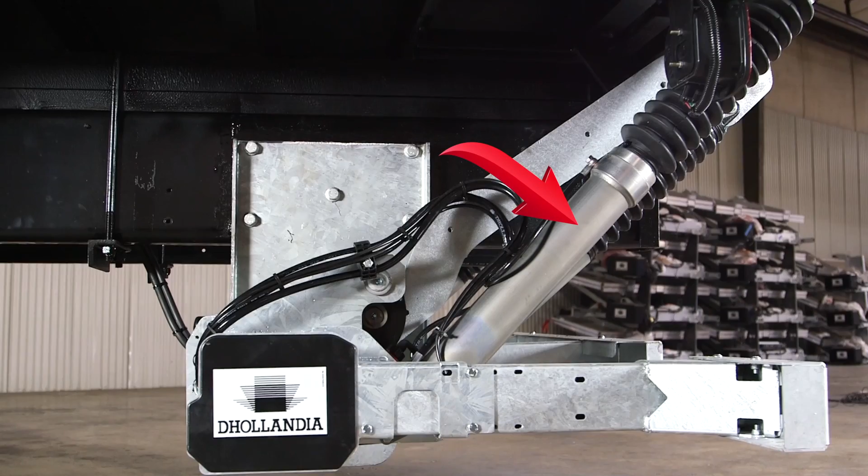Most DHLM cantilever lifts feature a solid, one-piece platform made of steel or aluminium, which covers the back of the vehicle when not in use. The platform is moved up and down by heavy-duty lift arms and hydraulic cylinders, mounted on a main lift frame that attaches to the vehicle chassis by means of a pair of mounting plates.

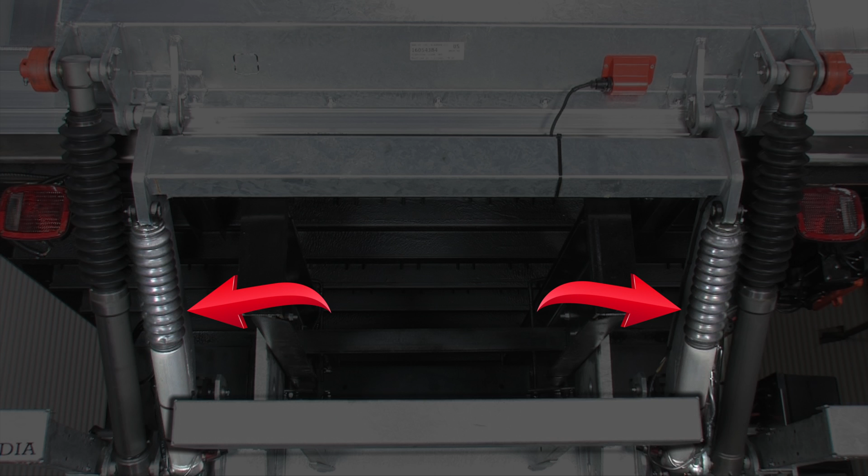The DHLM is driven by 4 hydraulic cylinders: 2 lift cylinders to lift and lower the platform, and 2 tilt cylinders to open and close the platform, adjust its inclination to the slope of the ground, and maximize the stability of the load on the platform.

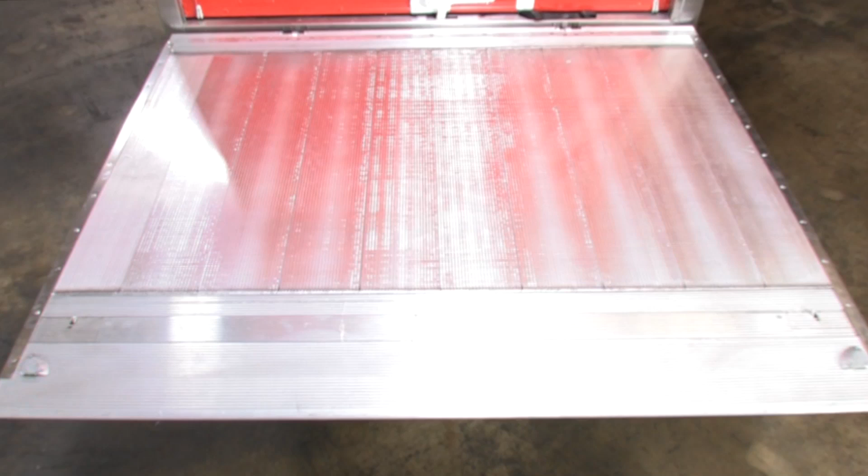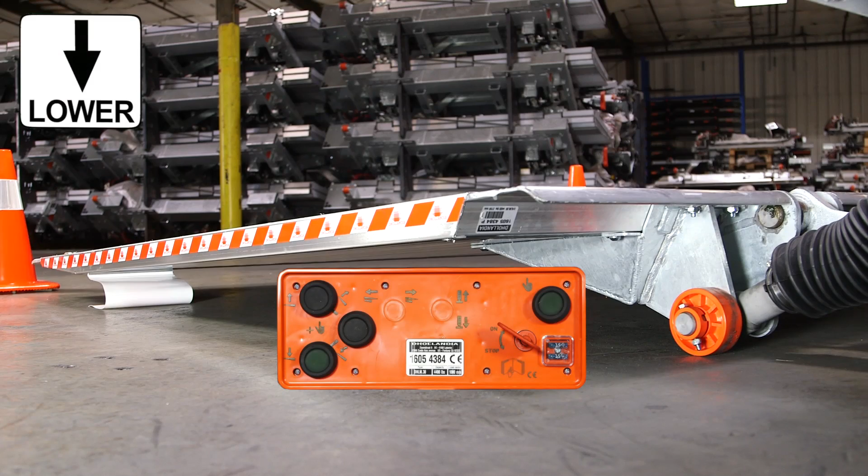The DHLM are designed as level ride platforms with a repeatable auto tilt function at ground level. When the platform goes down and arrives at the ground, it will tilt down automatically as the operator continues to press the down button. When pressing the up button to lift the platform off the ground, it will first tilt itself up to the level ride position and return to the inclination you set when first opening the platform. Then the platform will continue to lift level ride to the vehicle floor.

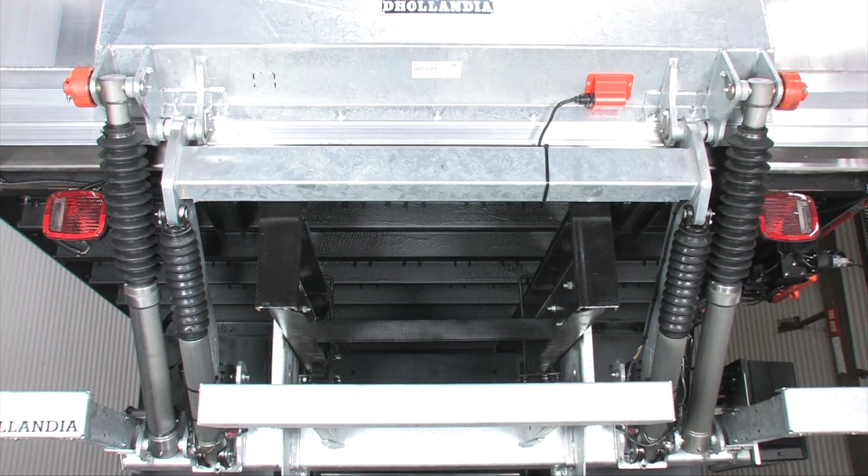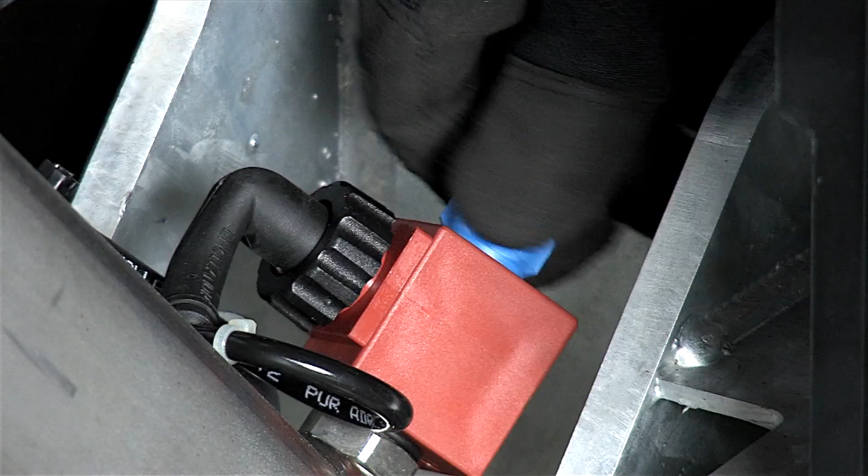Now have a closer look at the hydraulic cylinders. Each of the 4 cylinders is equipped with electric safety valves that automatically unlock and lock as the electric controls are activated or released. The electric safety valves used on Dhollandia tail lifts feature a manual emergency override so that they can be operated in case of electrical failure. Consult the maintenance and repair manual before using this feature.

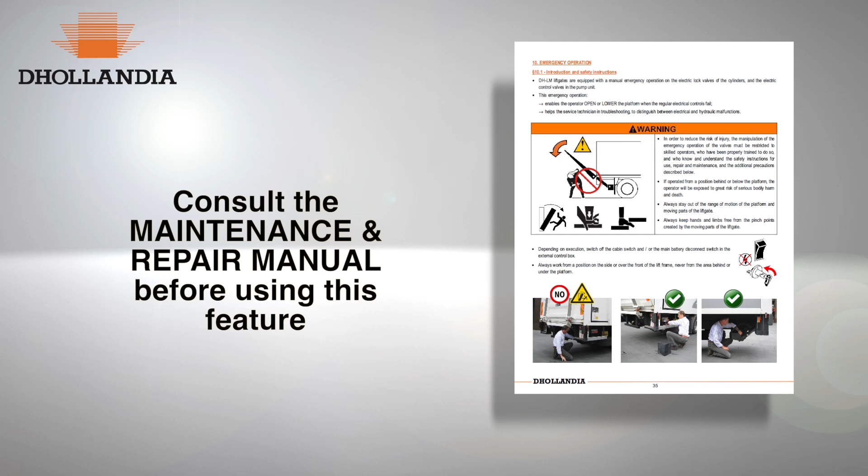The 4 cylinders are driven by hydraulic pressure generated by the pump unit, generally pre-mounted at the side of the main lift frame. Inside, you will find a starter solenoid, electric motor, hydraulic pump, oil reservoir, electric control valves, and a wiring block connecting the whole system.

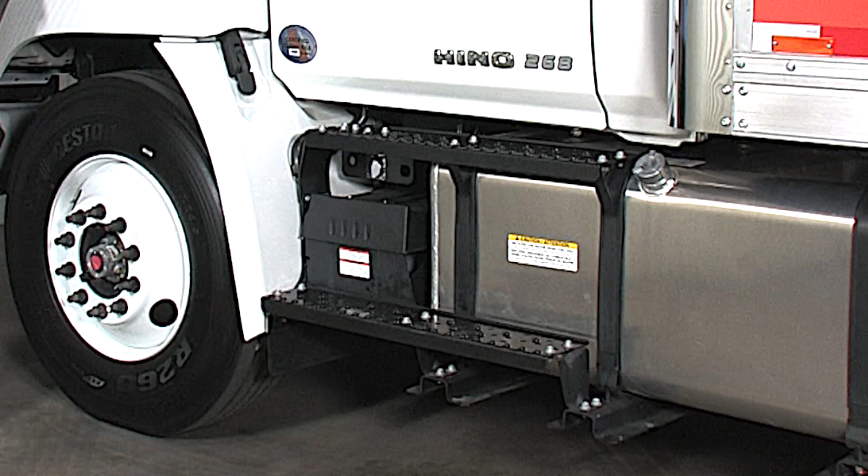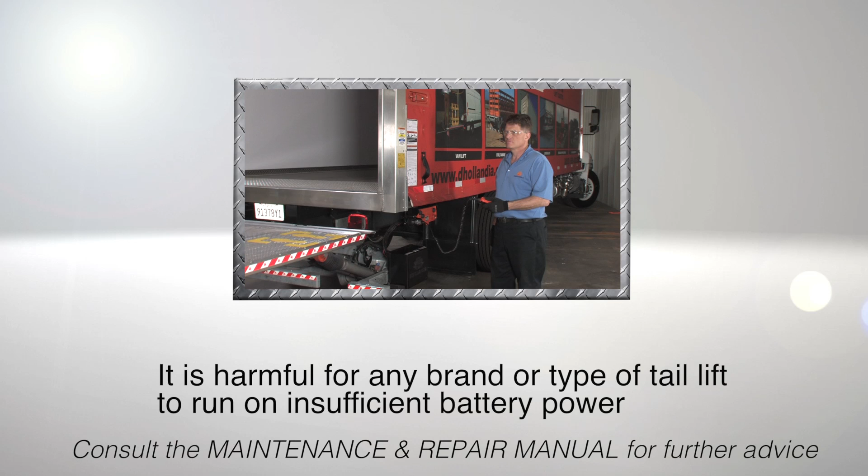The electric motor is fed by the truck batteries or an auxiliary battery pack charged by the alternator of the truck or tractor unit. The power cable from these batteries to the pump unit is protected by a main fuse or circuit breaker. These can cut out if the tail lift is run too many cycles without recharging the battery. It is harmful for any brand or type of tail lift to run on insufficient battery power.

Most tail lifts are equipped with a main external control box and remote control with spiral cable. The main external control box is mounted on the side of the body and should only be accessed when standing on the ground. The most popular main external control boxes function by means of push buttons or by means of a joystick control. They are equipped with mandatory 2-hand control for all 4 functions: open, lower, lift, and close. This setup complies with European safety standards.

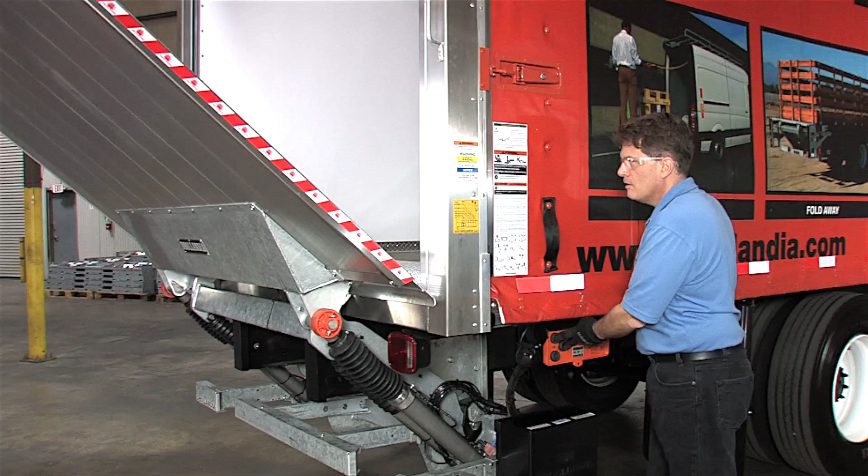It prohibits the operator from standing under or behind the platform when opening the platform. It also prevents the operator from crushing his head or limbs between the platform and the rear frame of the body when closing the platform.

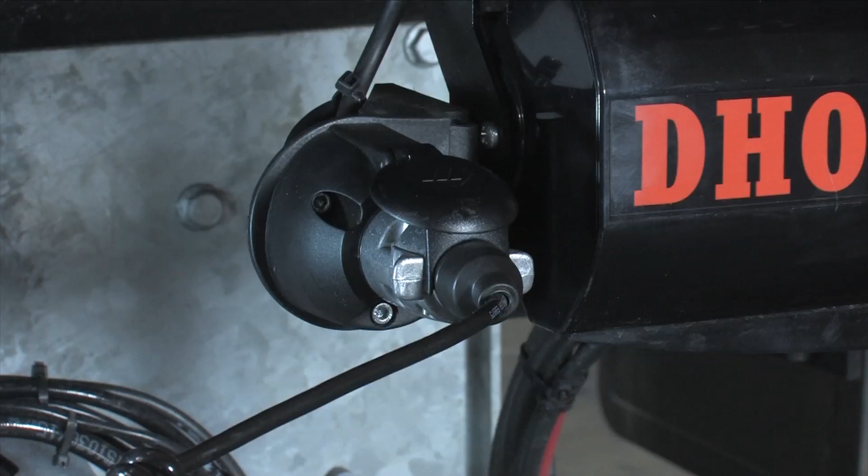The most popular auxiliary controls include foot controls mounted in the platform surface, or handheld control with spiral cable plugged in here or here. Depending on the options ordered, all controls are powered by a main battery disconnect switch integrated in the main external control box, or a cutoff switch mounted in the vehicle cabin, or a combination of both.

The main battery disconnect switch is located here. Turning it clockwise will activate all controls. Turning it counterclockwise will shut off all power to the tail lift. The cab switch is activated by pressing the red button, like this. A warning light indicates that power to the lift is switched on. It is shut off by pressing the button again, like this.

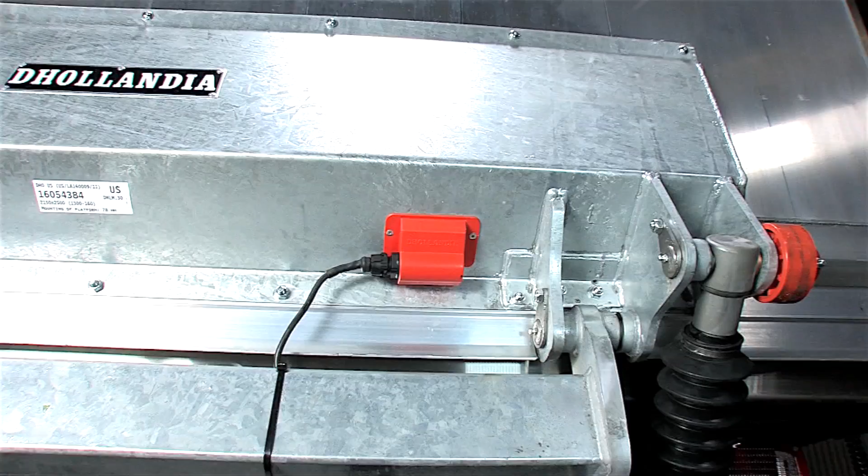For tail lifts equipped with an optional tilt sensor on the platform, the warning light of the cab switch will not only indicate if the power to the tail lift is switched on or off, but also if the platform is properly stowed in the road position.

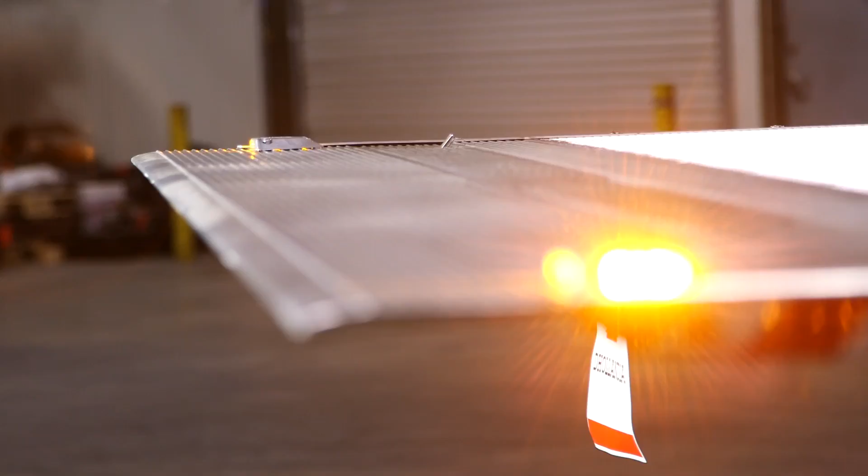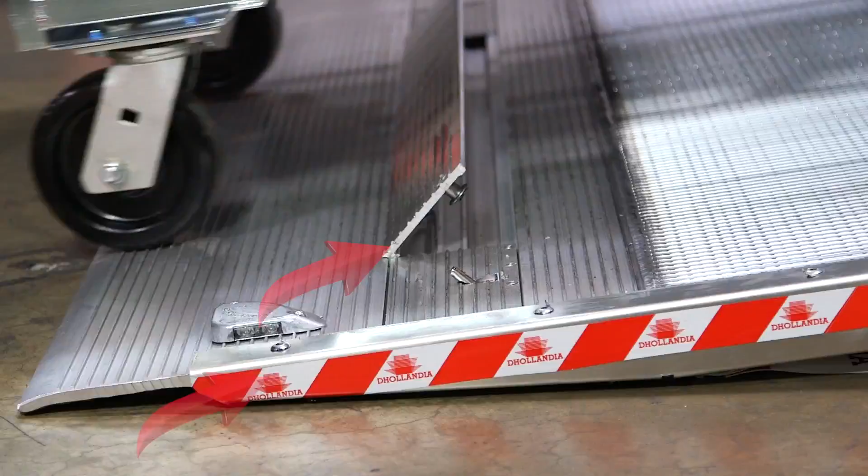Other popular options include platform-mounted flashing lights to make the platform visible to other persons at night, and automatic or manually operated roll stops, which prevent wheeled goods from rolling off the outboard platform edge.

For platforms equipped with the optional tilt sensor and platform lights, the platform lights will switch off automatically as the platform is closed in the road position.

All Dhollandia tail lifts are supplied with an operation manual. This manual should be kept with your vehicle. All manuals can be downloaded from the Dhollandia website, www.delandia.com, via the indicated link. Additional paper copies can be ordered from Dhollandia via the relevant distributor number.

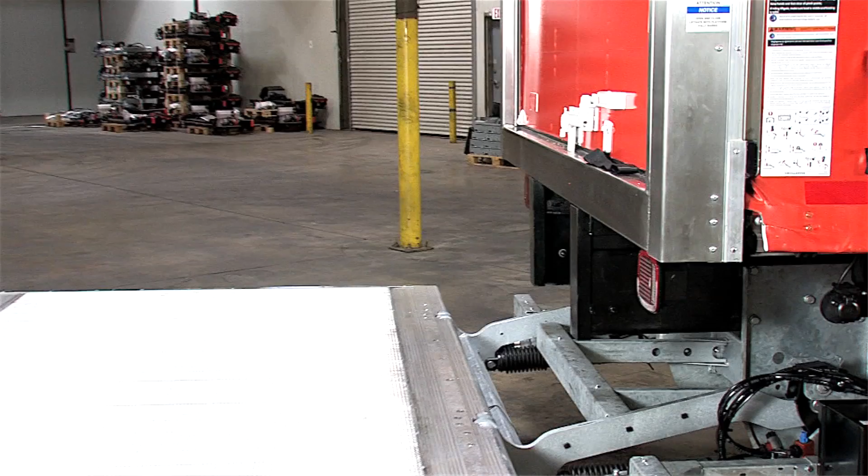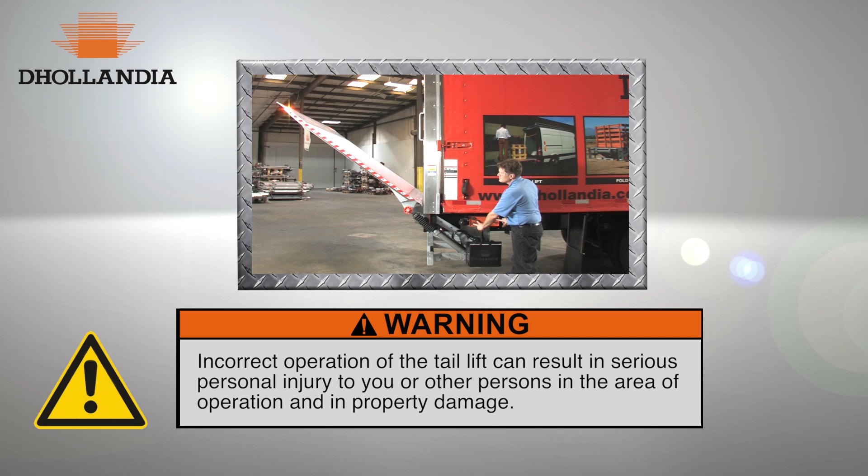This video is just a quick start guide to proper and safe work procedures. It is essential that you read and fully understand the operation manual and its safety precautions before operating the tail lift. Incorrect operation of the tail lift can result in serious personal injury to you or other persons in the area of operation, and in property damage.

It is your responsibility to ensure you comply with all warnings and operating instructions in the operation manual. Never allow untrained or unauthorized persons to operate the tail lift. Dhollandia recommends you wear professional safety toe footwear with a good non-slip sole, protective gloves, and eye protection.

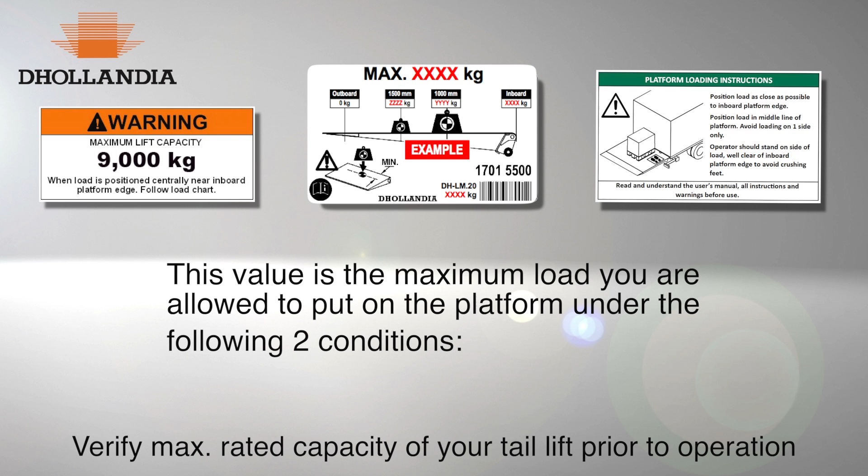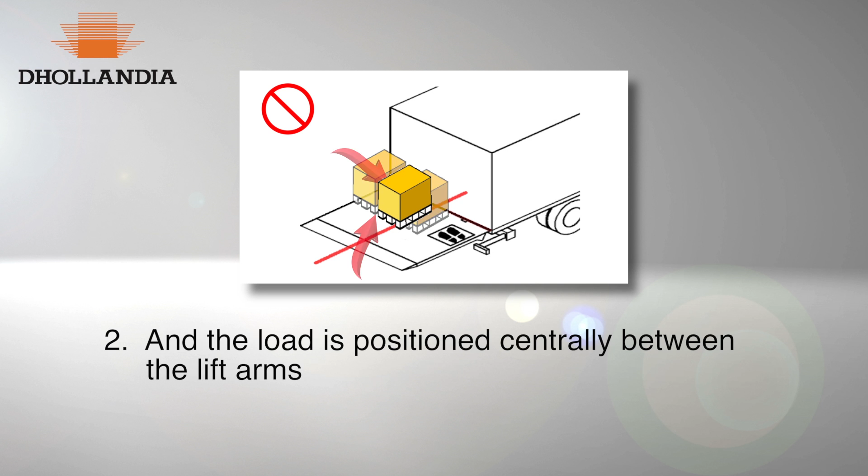The DH-LM have maximum rated capacities that range from 500 to 9,000 kilograms depending on the model. This value is the maximum load you are allowed to put on the platform under the following two conditions: the heaviest part of the load is positioned as close as possible to the inboard platform edge, and the load is positioned centrally between the lift arms.

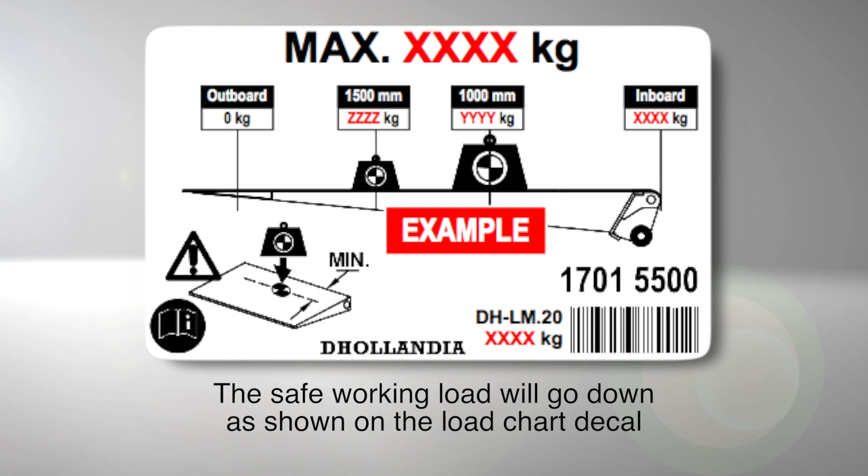If you place the load further away from the rear of the vehicle or out of center, the safe working load will go down as shown on the load chart decal. There are marks on the platform here and here to indicate where the center point of maximum load and area of greatest strength is located.

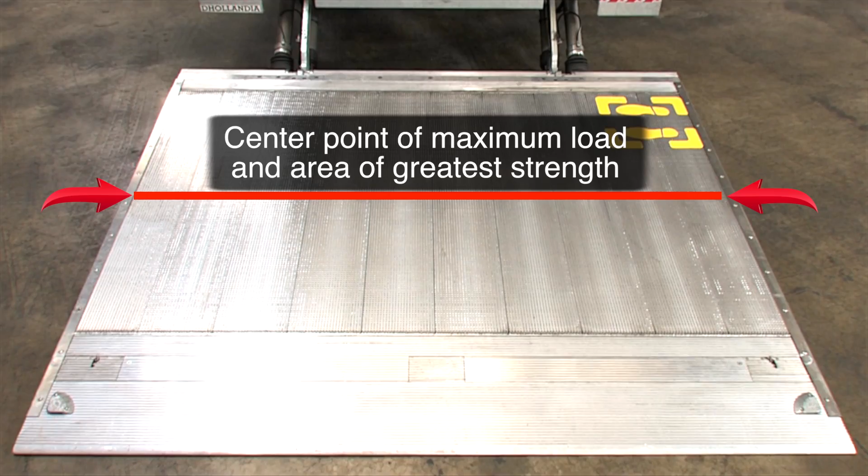Never place a load on the platform that exceeds the rated capacity and load charts. Overloading can damage the tail lift and cause severe personal injury to the operator and to other persons in the working area. The load should never protrude beyond the outboard edge or side edges of the platform.

Forklifts are a frequent source of accidents and severe damage. They should only be used in highly restricted conditions. Consult the operation manual for limitations.

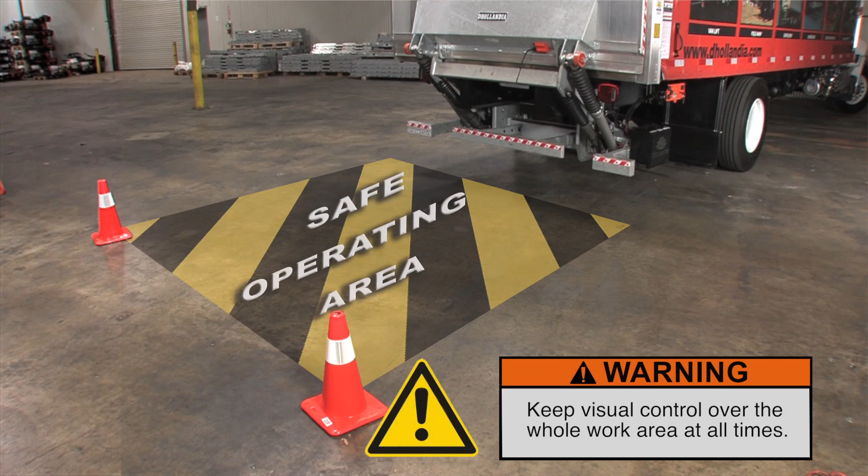Check that the work area is clear and make sure the tail lift can be used safely. It is good practice to place safety cones at the corners of the work area and keep visual control over the whole work area at all times. Don't allow any other person near the tail lift or its platform while it is in use.

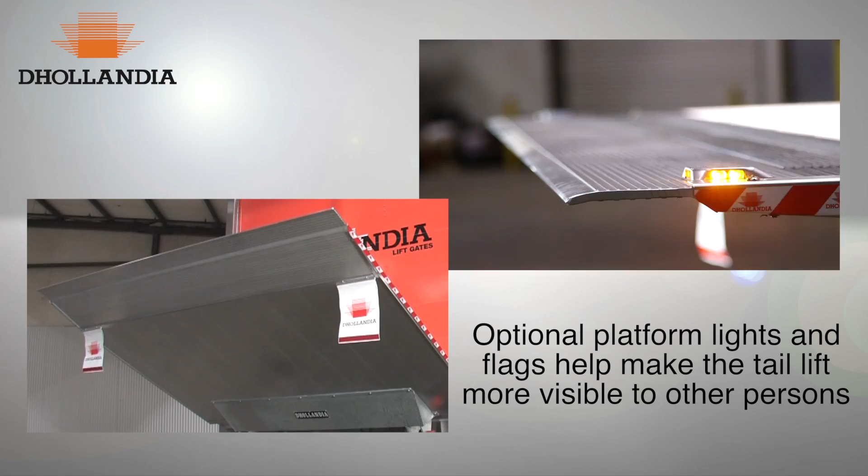Optional platform lights and flags help make the tail lift more visible to other persons. Be prepared to guide other persons away from your work area.

There are 4 main danger zones that must be avoided at all times. 1. The area under and behind the platform. Stay clear of the range of motion of the platform and the moving parts of the tail lift at all times.

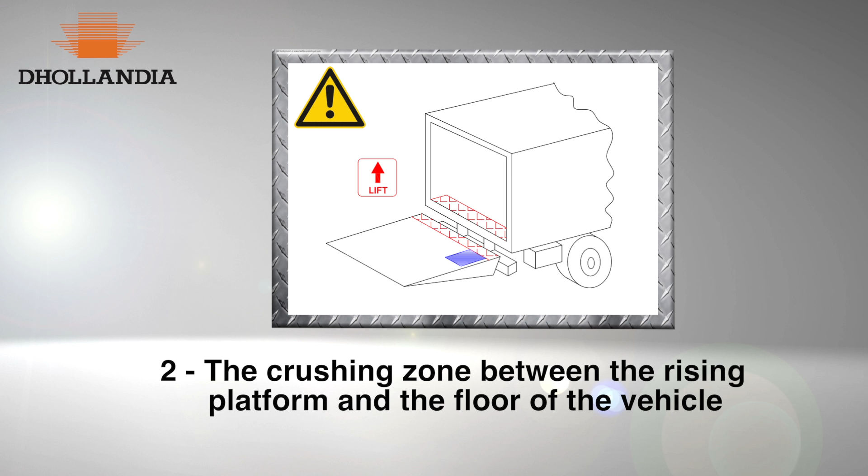2. The crushing zone between the rising platform and the floor of the vehicle. Keep your feet at a safe distance of a minimum 25 centimeters away from the inboard platform edge.

3. The crushing zone between the lowering platform and the ground. Stand at a safe distance on the side of the vehicle while operating the tail lift from the ground.

4. The crushing zone between the closing platform and the rear frame of the body. Use the main external control box with 2-hand operation to ensure that your head, hands or upper body don't get trapped between the platform and the vehicle body.

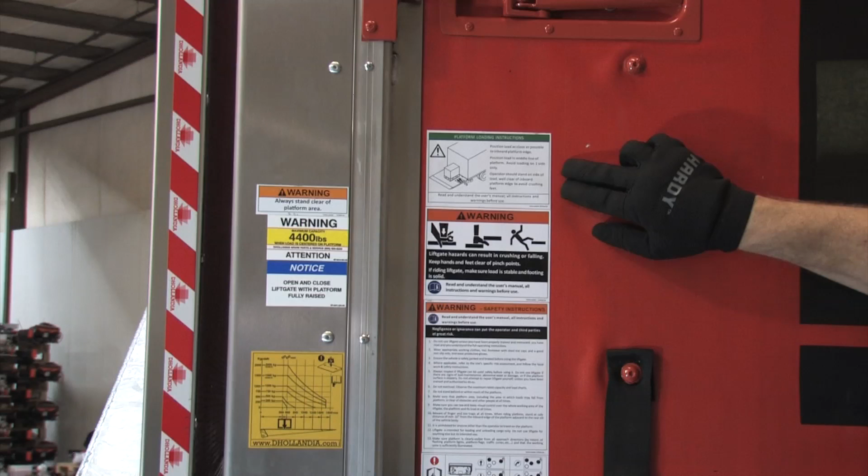Important decals are affixed near the main external control box. Make sure that you fully understand and comply with these warnings prior to operating the tail lift, and keep them clean and legible at all times. Replacement decals and manuals can be obtained from Dhollandia via the relevant distributor number.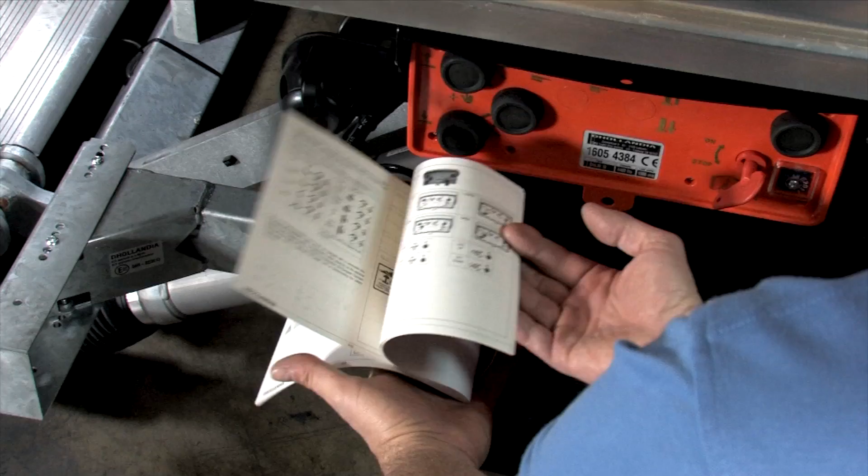You must comply with all safety warnings and operating instructions. Failure to do so can result in injury to you and others in the area of operation.

An open platform is a potential hazard for people or vehicles passing by. Always make sure the tail lift is fully stowed whenever it is not in use, and before moving your vehicle, first stow the platform in its travel position.

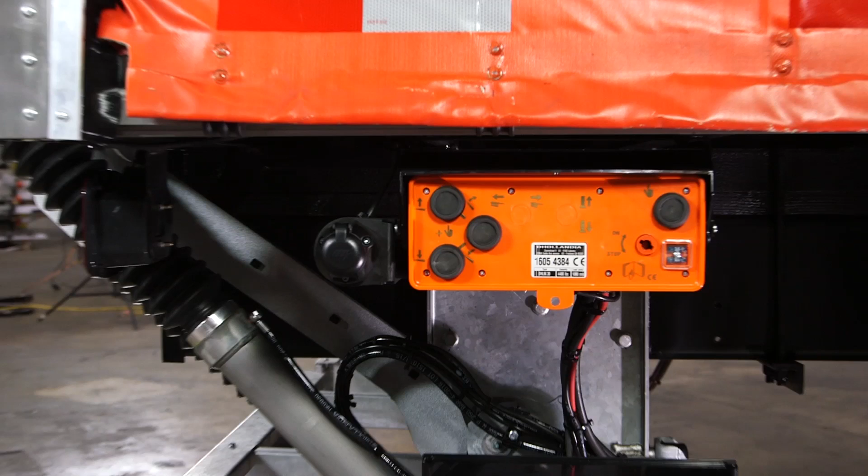Before operating your tail lift, there are some daily checks that must be performed. Begin your inspection at the main external control box.

Check the overall condition of the control box and its switches, and verify if all switches swiftly return to the neutral position after releasing them. If so equipped, make sure the main battery disconnect switch and cabin switch switch the electric power on and off according to the set position.

Check the overall condition of the auxiliary controls and their switches. In case of a handheld control, inspect the spiral cable.

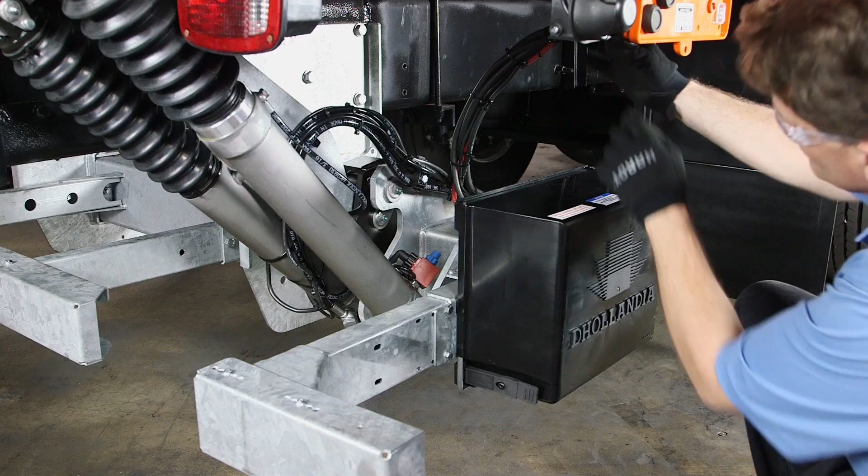Next, check the overall condition of the cabling to the pump unit. Make sure the cables are not chafed or damaged. Check that the cover of the pump unit is properly mounted and secured, and look for visible oil leaks.

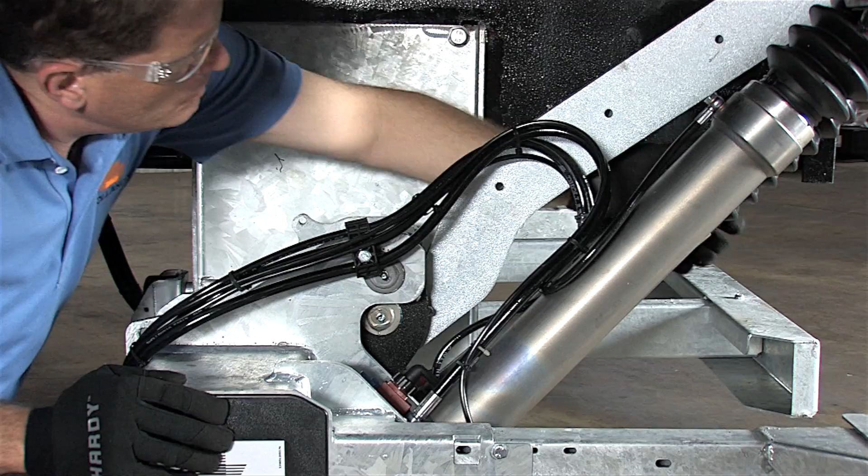Check all cylinders, their safety valves and fittings for visible oil leaks. Follow the hydraulic pipes and fittings to the pump unit. Make sure all wires and hydraulic pipes are undamaged and secured with cable ties. Check for visible oil leaks.

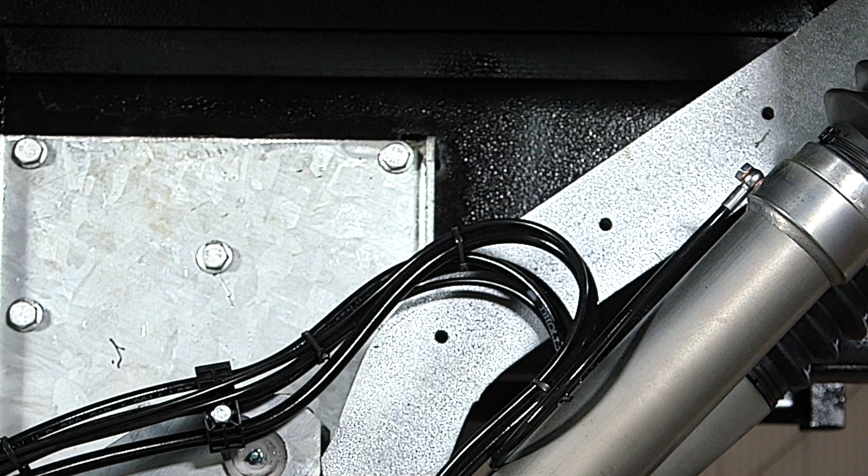Visually inspect the general condition of the lift arms, lift frame and its mounting plates to the vehicle chassis. Look for deformation, cracks in the material or welds and proper locking of the articulation pins. Ensure all bolts for the mounting plates to the vehicle chassis are fastened.

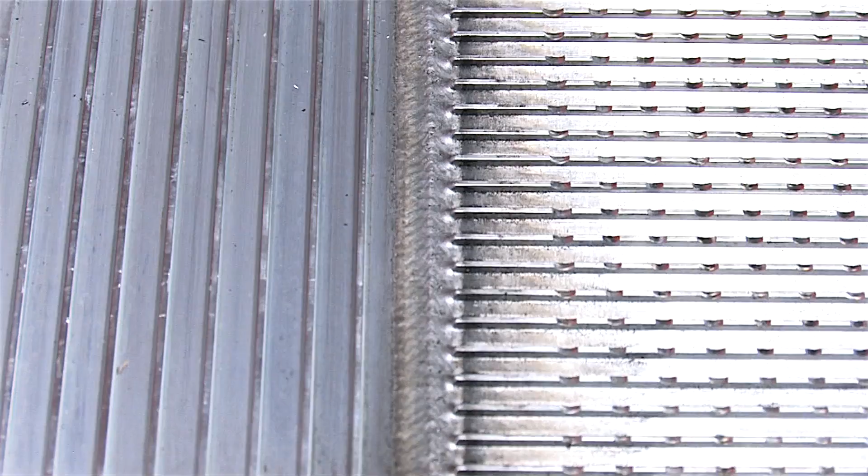Finally, inspect the general condition of the platform. Again, look for deformation, cracks in the material or welds and proper locking of the articulation pins. Depending on options installed, make sure flashing warning lights, roll stops, foot controls, safety rails, etc. are in good working order.

Make sure the platform surface is clean. If the platform is covered with snow, mud, dirt or slippery liquids, do not use the tail lift and clean the platform first.

A properly installed and maintained tail lift should operate smoothly and fairly quietly through its range of motion. Be alert to any unusual movements or sounds such as scraping or squeaking noises, as well as sounds of the pump unit struggling or slowing down in an unusual manner.

If you notice unusual movements or sounds, discontinue use of the tail lift and contact an authorized Dhollandia service agent for immediate repair. Make sure you hit the road with the lift gate maintained in safe operating condition. Remember, regular maintenance is very important for the reliability of the tail lift and for the safety of the operator and other persons near the tail lift.

Before operating the tail lift, let's first focus on how to use the control units. The most popular main external control boxes are operated like this: open, lower, lift, close.

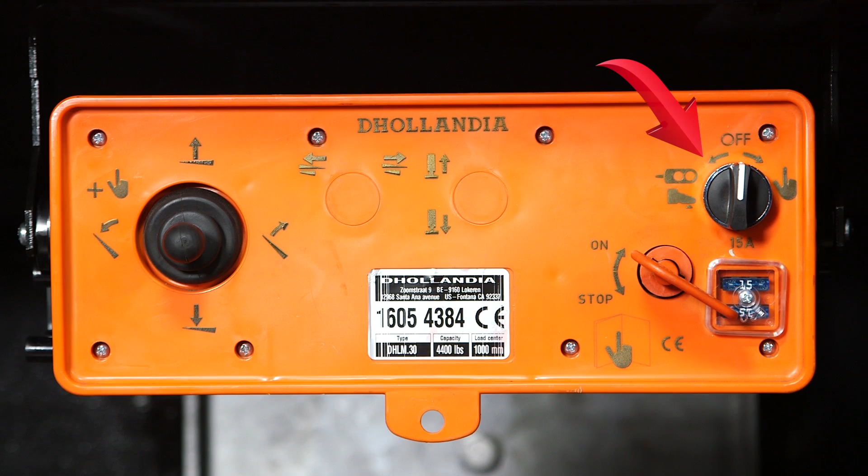The auxiliary controls are activated as follows. On main external control boxes with a rotating safety switch, turn this safety switch counterclockwise to a fixed position. On main external control boxes with a push-button safety switch, the auxiliary controls are activated whenever the safety switch is not pushed in. The remote control with spiral cable is operated like this to lift the platform, like this to lower the platform.

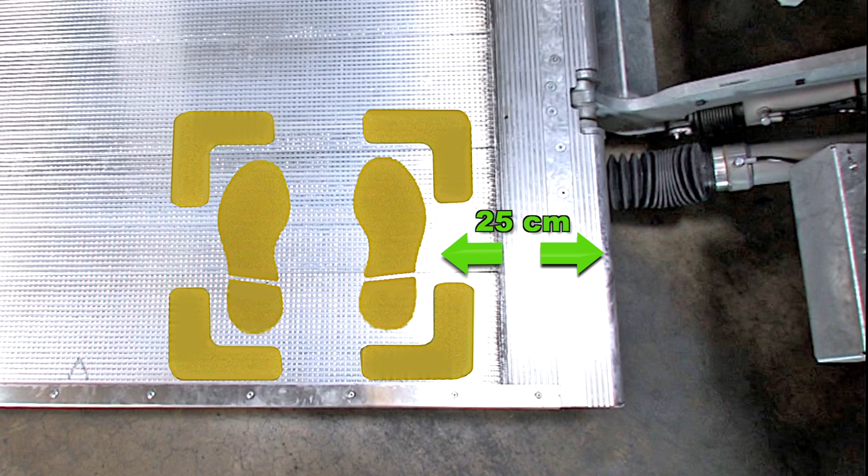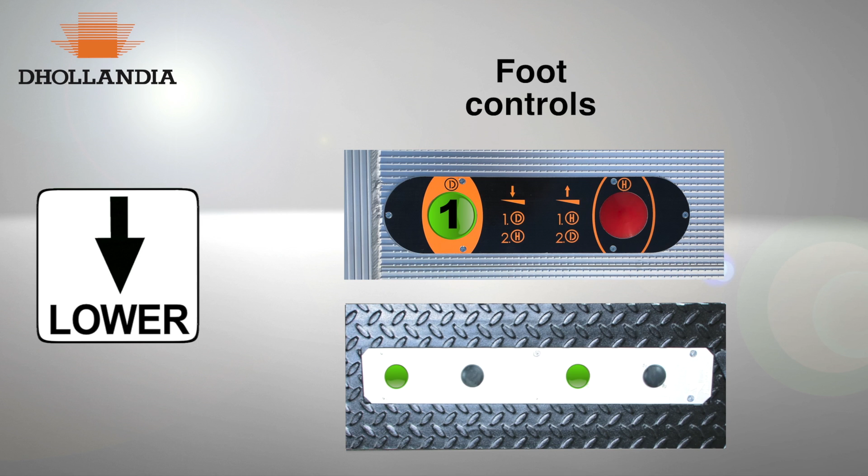Whenever operating these controls from a position on the platform, make sure you stand at a safety distance of a minimum 25 centimeters from the platform edge. The platform-mounted foot controls are operated like this to lift the platform, like this to lower the platform.

If your tail lift is equipped with a different style of control, consult the operation manual prior to using the tail lift. Whenever traveling on the platform, make sure your footing is stable and maintain 3 points of contact.

Next, let's look at correct tail lift operation. We will do a run with an empty platform first, then add a load sequence to that.

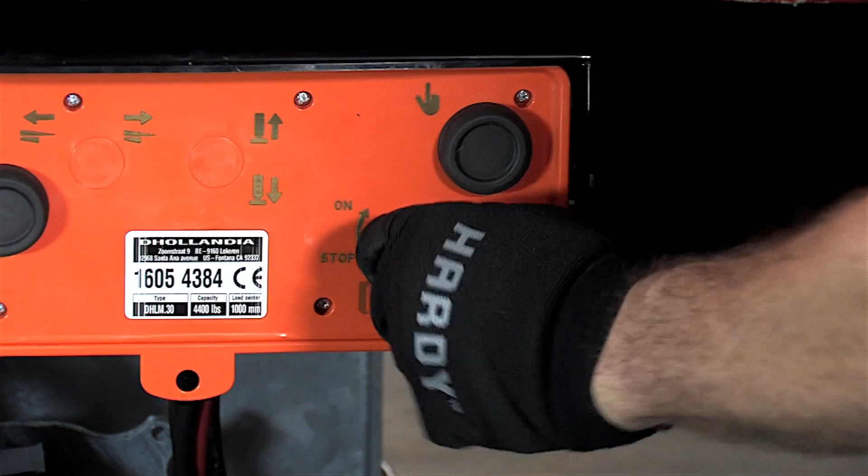Set the brakes. Switch the electric power on by pushing the cabin switch like this, or by turning the battery disconnect switch in the main external control box clockwise like this, or by a combination of both. The DHLM lift is now enabled for operation.

If so equipped, release the mechanical platform lock. Open the platform from the vertical road position to the horizontal work position by means of the open function of the main external control box. Always open the platform at vehicle floor height only, and make sure nobody stands under or behind the platform.

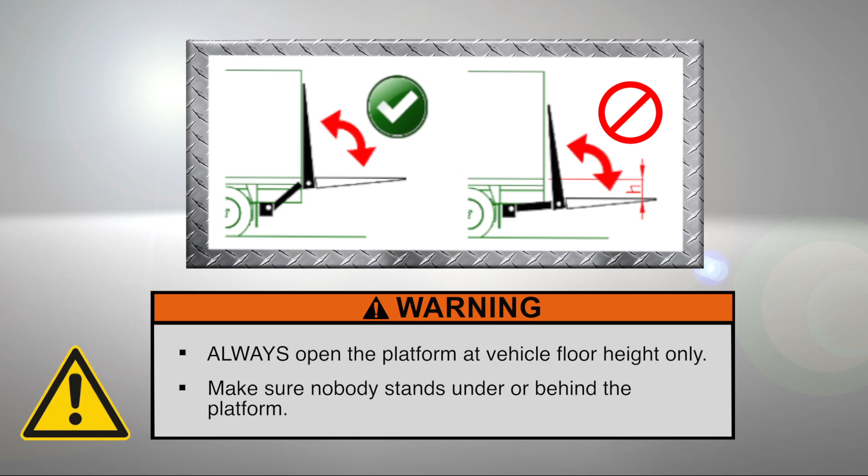Release the buttons once the platform has opened to the desired inclination. Next, lower the open platform by pressing the down function of the main external control box or the auxiliary control until the platform is tilted at the ground.

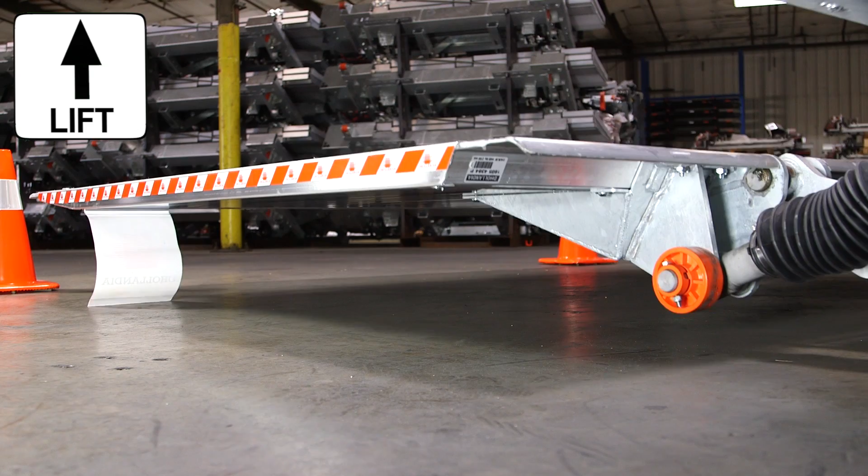To raise the platform to the vehicle floor, use the lift function on the main external control box or the auxiliary controls. The platform will first tilt up to the inclination preset upon platform opening, then it will continue to raise level ride to the vehicle floor. Release the switch as you hear the hydraulics turn in over pressure.

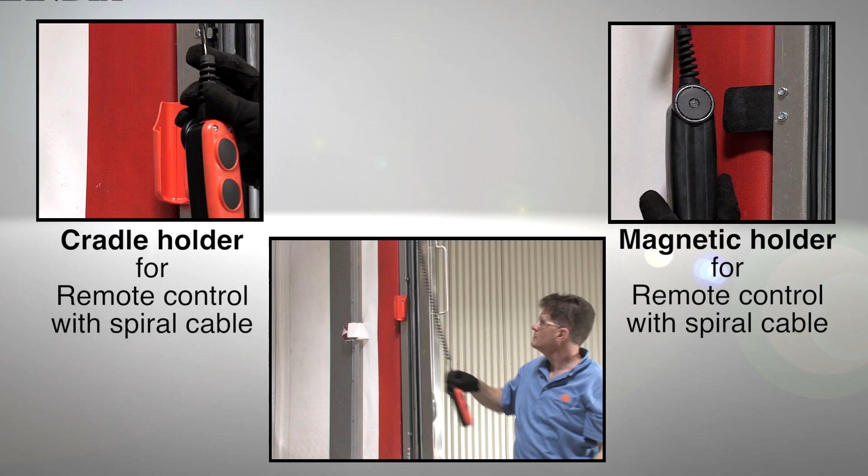If you are using the remote control with spiral cable, stow the control gently. Finally, to stow the platform back in its travel position, first make sure it is fully raised to the vehicle floor level. Then use the close function of the main external control box to close the platform back in its travel position. Release the switch when the platform presses firmly against the body and you hear the hydraulics turn in over pressure.

If the platform is equipped with a mechanical platform lock, engage the lock. At last, switch off the electrical power by turning the main battery disconnect switch in the main external control box, or by pushing the cutoff switch in the truck cabin, or by a combination of both.

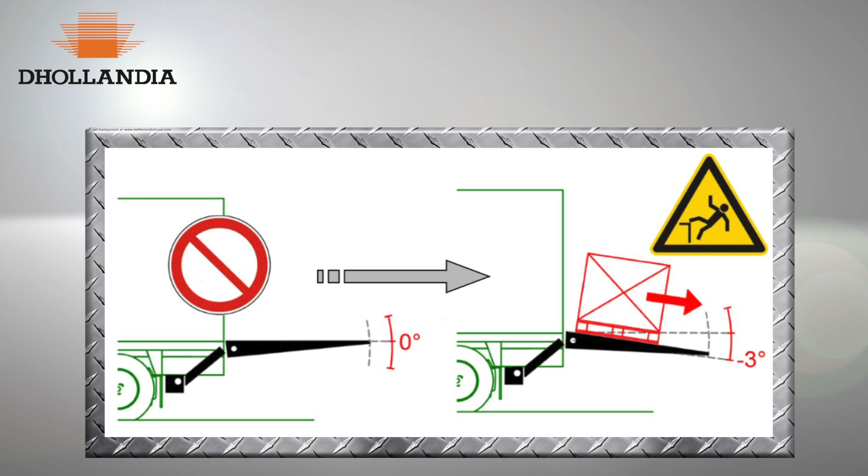Let's look at loading and unloading again, starting from the open platform at the vehicle floor level. Adjust the inclination of the platform 2 to 3 degrees up to compensate for deflection in the vehicle suspension and tail lift assembly once the platform is fully loaded.

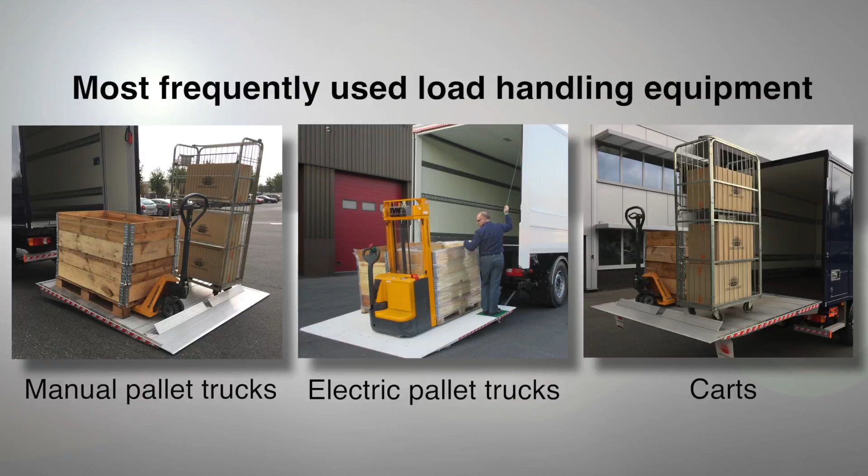Most frequently used load handling equipment include manual pallet trucks, electric pallet trucks, and carts. When handling pallets, lower them down on the platform surface to prevent the pallets from shifting or rolling off the platform unintentionally. Carts or other wheeled loads must be secured on the platform by other means.

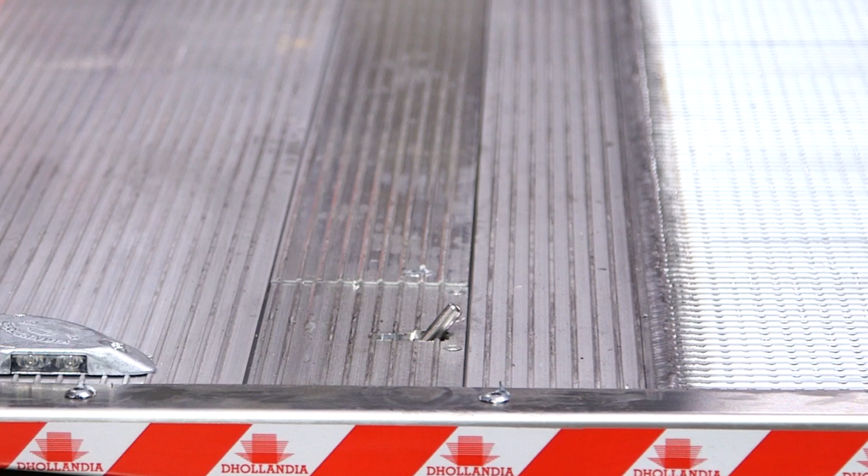Deploy the roll stops on your platform prior to pushing the load from the cargo space onto the platform. For automatic roll stops, use the tip of your shoe to kick the lever outward.

Dhollandia offers optional roll stops in different variations. If your tail lift is equipped with a different style of roll stop, consult the operation manual or the additional videos on the Dhollandia website.

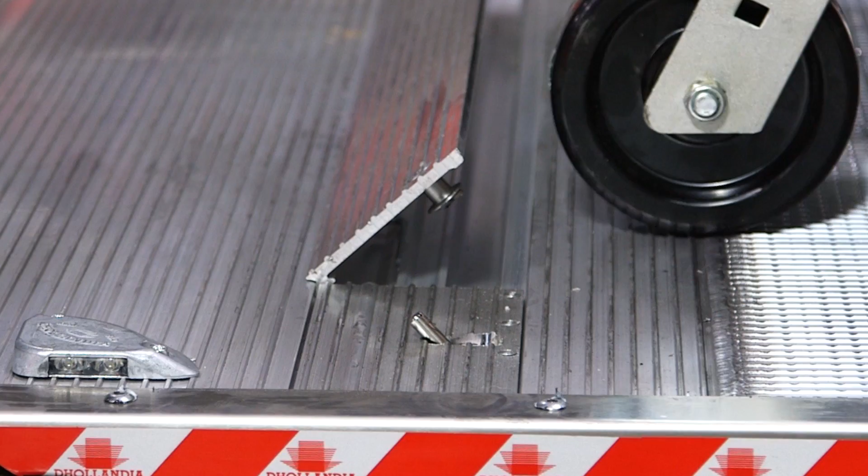Now push the load onto the platform. Push it out far enough for clearance to go down, but keep the heaviest part of the load as close as possible to the inboard platform edge to comply with applicable load charts.

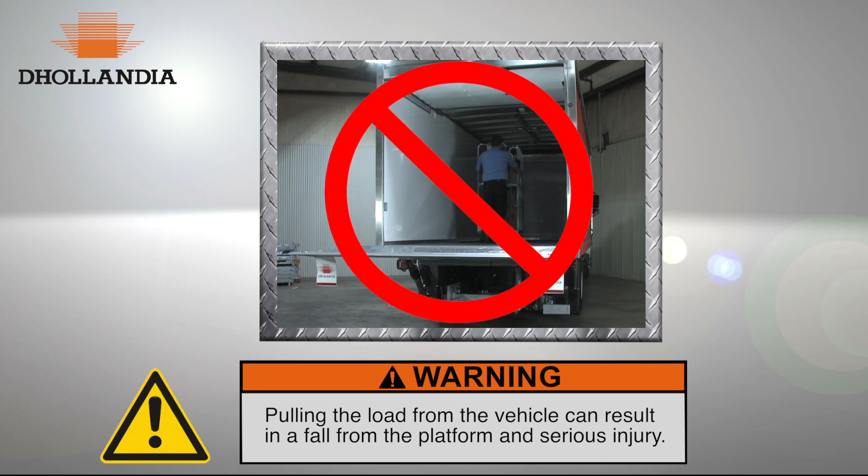Always push the load from the vehicle floor onto the platform. Pulling the load from the vehicle can result in a fall from the platform and serious injury. Check again visually that nobody or nothing has come into your work area.

Then use the auxiliary controls to lower the platform to the ground. While traveling up or down, stand on the side of the load, never in front or behind. Make sure your footing is stable and always maintain 3 points of contact. Keep the down button pressed to allow the platform to tilt to the ground.

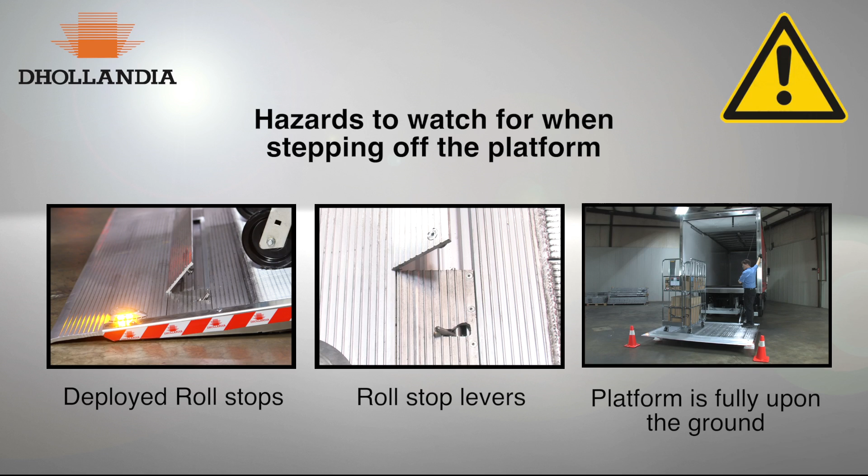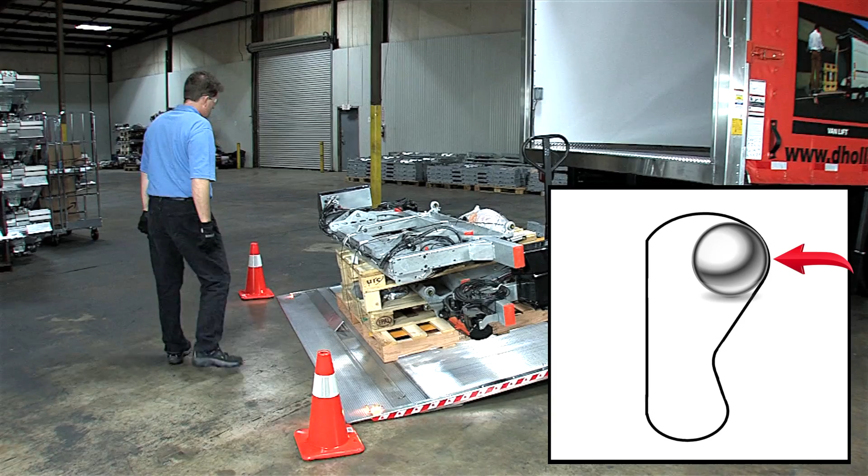If you have deployed the optional roll stops, now is the time to stow them again. When offloading, simply step on the roll stop and make sure the lock lever moves back to the locked position.

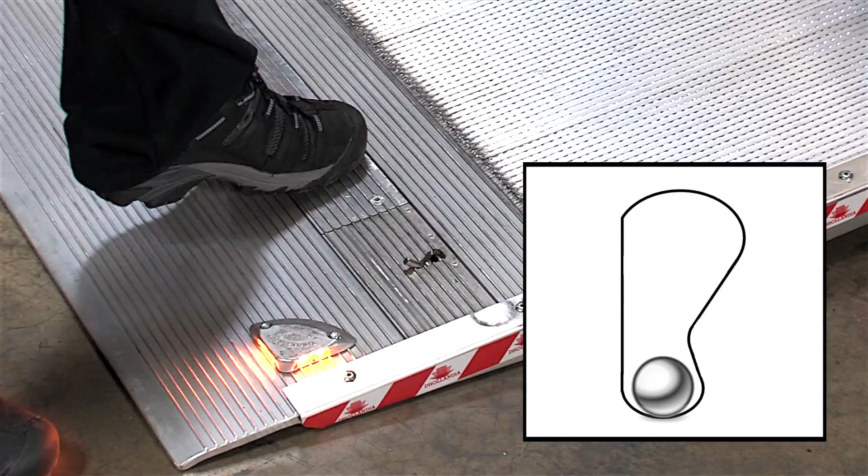When loading from the ground onto the platform, there are 2 modes to operate the automatic roll stops. When pushing the lever just to the side, the flap will remain closed after you step on it or ride a cart over it. When pushing the lever to the side and to the rear, the flap will jump up again to open position after the cart's rollers have passed over it.

Roll the load on the platform. Use the lift function of the auxiliary controls to raise the platform from the tilted position to the level ride position and further raise the platform to the vehicle floor.

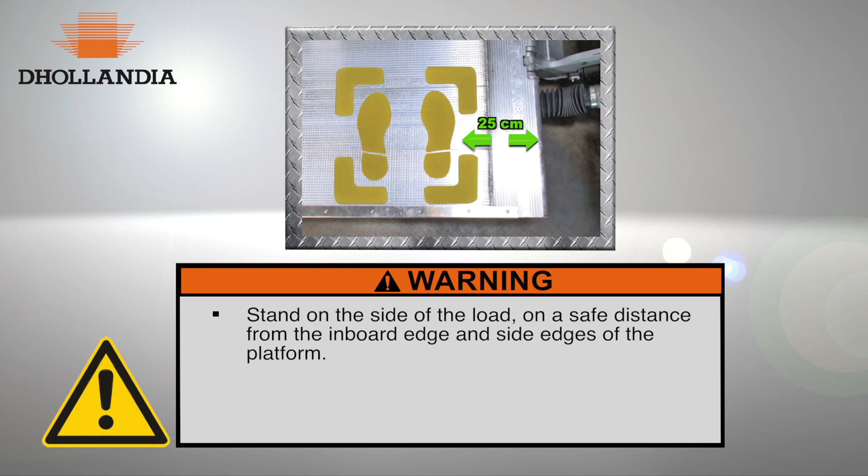Remember to stand on the side of the load at a safe distance from the inboard edge and side edges of the platform. Make sure your footing is stable and always maintain 3 points of contact. At the vehicle floor, release the lift button as you hear the hydraulic system go into over pressure.

Carefully move the load inside and secure it per your company policy.

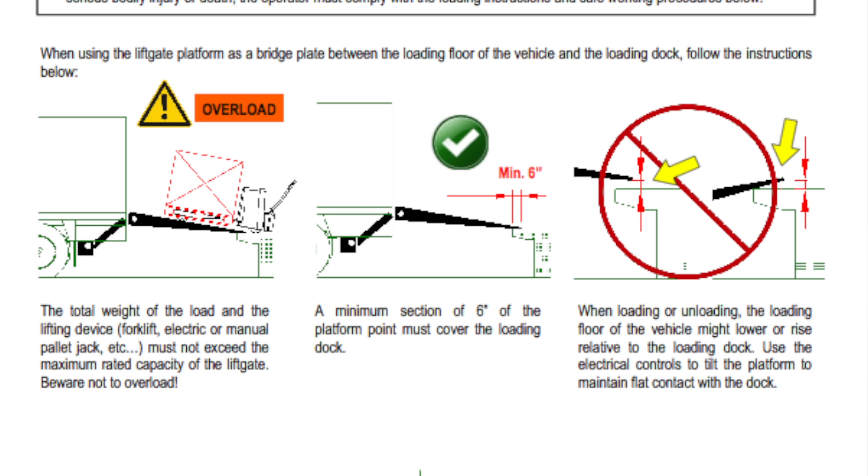Special instructions apply for working at loading docks. They are recognized by most manufacturers as an important cause of tail lift damage. Consult Dhollandia's manual prior to reversing a cantilever lift into a loading dock.

We wish you a safe journey and trouble-free use of your Dhollandia tail lift. And remember, make sure you read and apply all safety precautions and work instructions from the operation manual. Contact Dhollandia in case of doubt prior to continuing.